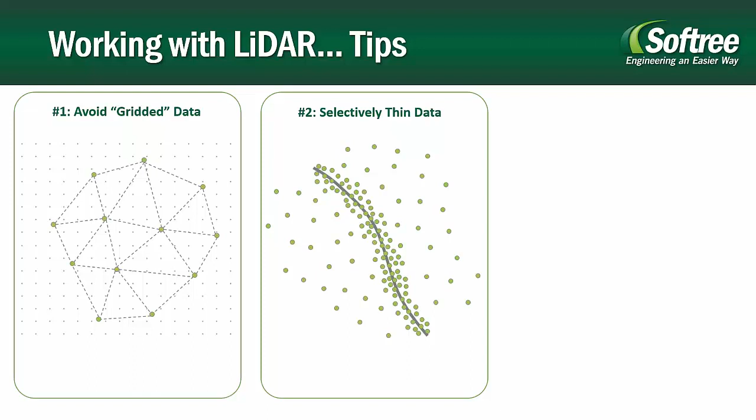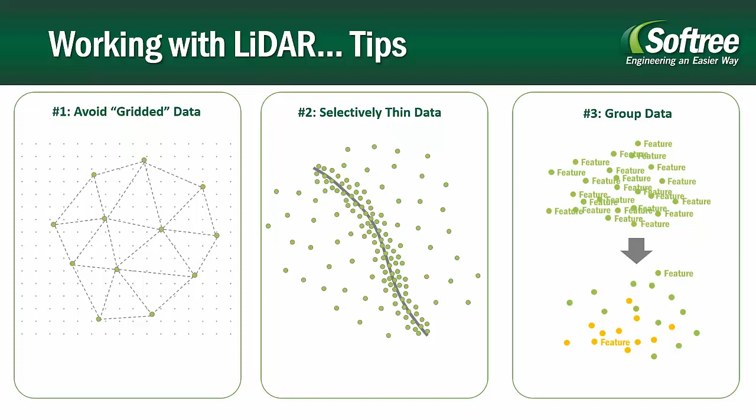And our third tip applies specifically to LiDAR data that's coming in as an ASCII data set. This is just combining features upon import. It saves a tremendous amount of memory and makes it a lot easier to work with. So the other piece I wanted to address before I pass it over to Dave, he is going to show you one workflow example today for working with LiDAR.

There are a lot of different workflow options that exist with our software. We've got two different areas where you can thin your LiDAR. You can thin it at import, and you can use a LiDAR thinning tool after import. So you've got a bunch of options, and depending on your data, the workflow that's best suited for it is going to vary. Our support team is always willing to field any questions you have about how to work with your LiDAR and what workflow works best for you.

As I said, you can import tiles all at once. You can import tiles individually. You can keep them at full resolution. You can thin them at import. You can crop them at import. You can thin them after import with our better quality thinning tool called point simplification. And then you can design using that full resolution data, depending on how big your area and your data set is. Or you can design your roads and features on thin data and just keep it as is.

Or you can design it on very thinned data as an initial concept and then re-import and re-thin your data. And one of the ones that Dave is going to include today in his example, he's actually going to crop the LiDAR on import. So selecting a specific area of interest that's a little bit narrower than the amount of tiles he's got. And then he's going to show some thinning techniques and work with it from there.

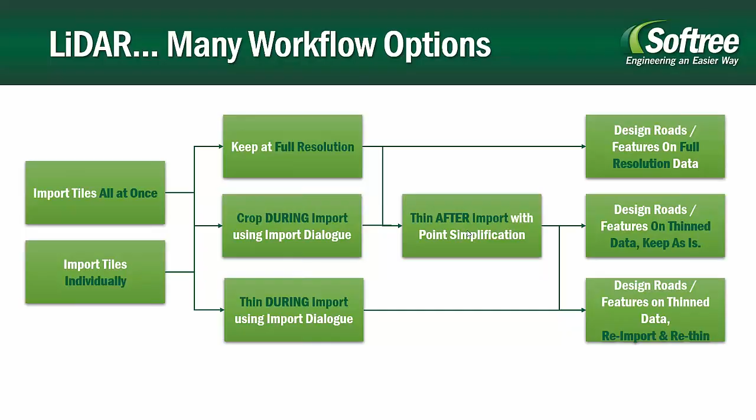Okay, we're working with the terrain module to start, so let's load up terrain module version number 9. Got a new splash screen here. We're getting ready to release version 9. What I'm showing you today is in both version 8 and version 9, so you don't have to worry about new features that you don't have yet. There is one feature I will not show you, but Live Map for importing images is pretty cool in version 9.

Okay, so let's first of all get ready to import some LiDAR data. Now, I don't really want to bring in all my LiDAR data, and I want to make sure I've got it in the right spot. So I'm going to open a shapefile, which shows the proposed block boundary. There's one, and I got another one in there too.

Now, I'm using File Open here, but actually I can use Insert too. Let me do that. Insert File, Shapefiles, and here's a little gotcha. Shapefiles come with an extra XML file. Do not try and open an XML file as a shapefile. It will fail. Anyway, if I pick this item from our import list, shape, then it only shows the shapefile heading, and those are the ones I want. And I want this block boundary and that block boundary. Whoops.

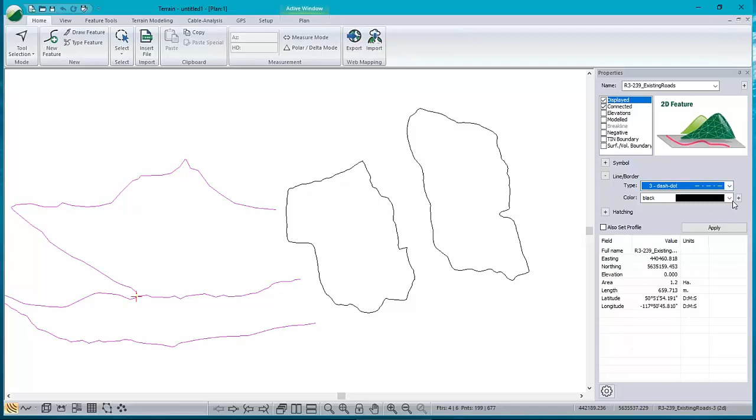There we go. When you're importing shapefiles, it's nice to sometimes import them one at a time, and then they come in selected, and you can modify lines and color. So for example, I just imported roads, so let's change the line type and color to be what I want to see for roads. Okay. Now the great thing about this file now is that I've got my two logging openings on the screen, and now I can bring in the LiDAR and see if it's in the right spot.

Okay, so let's again insert file. This time I'm going to pick all my LAS tiles. There they are. You want to, in general, use insert file when you're bringing in LiDAR data. First of all, because you can use the existing features in your terrain. And when you use file open, it deletes everything and starts again. So insert file. The other great thing about insert file is it allows you to select multiple files. Okay, so here's all my LiDAR points.

Now if I click on examine, it'll go away for a while and think, and it'll tell me how many user-defined points I have. Now this data set is unusual because they're all set as user-defined, and normally number 2 is called ground points. And this is the first LAS I found where it just says user-defined. So whoever set it up was a little sloppy. And it's not clear how many points I've got here. So examine files will tell me.

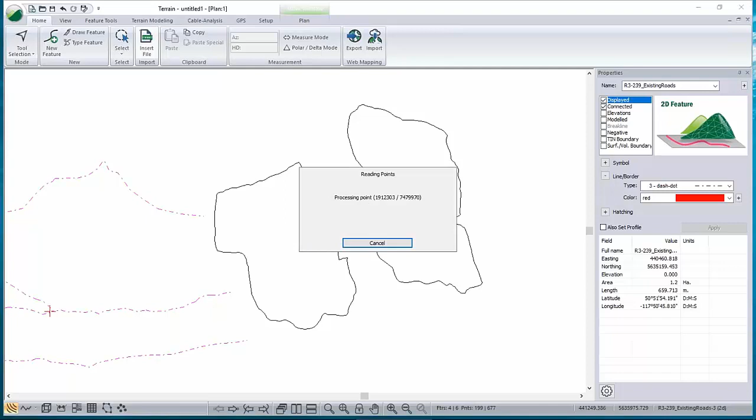So if you remember Aaron's little flow chart, this is thin at import, and there's my data. And you can see it coming up on the screen. Let's just zoom extents so we can see it all. And I've obviously got some data outside my area of interest. The blocks are over here in this blob, and then I've got this stuff over here.

Okay, so two things I've learned. I've got data in the right location. I can't remember whether it prompted. Normally it will prompt you and say coordinates undefined, do you want to read in these points? These points are in an LAS file. LAS does not come with a projection. I'm in the right projection because the data is landing on top of my shapefiles. So that's good news.

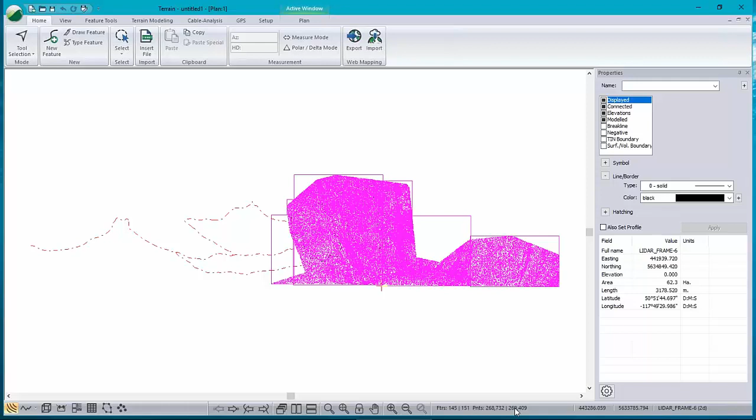The other thing I can see here is that I've got 269,000 points selected. So I read in 1 in 10. That means I've got 2.7 million points in the whole file in the ground points. Okay, those are good things to know. I'm going to delete these points and now read in a cropped set of data.

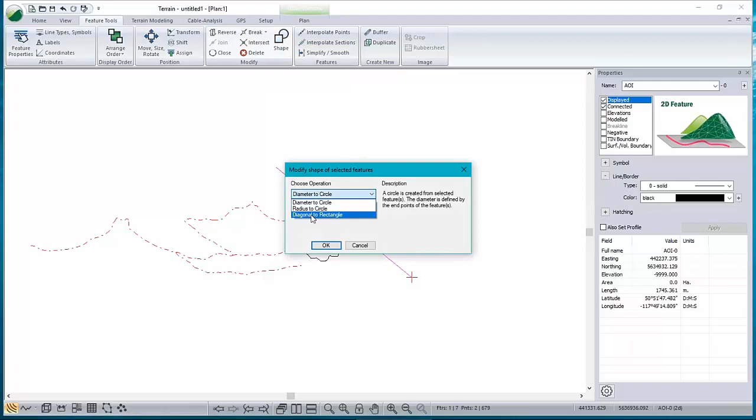So how do you crop data? Well, you build a polygon. So let's make a little polygon here. Call it AOI for area of interest. Doesn't need to be 3D, just a rectangle. Now I don't want to draw a rectangle by hand, so I'm just going to use this little feature operation to convert my diagonal into a rectangle. There we go. Right. So that looks like a good area of interest.

And now I'm going to read in my data again, cropping it. So insert file from the home ribbon, pick them all, and import options. Okay, I don't really need those borders. Let's turn those off. User defined, yes. Notice that the total number of points is quite a lot larger than 2.6 million, 43 million. So the other points in those files are not ground points.

Now I'm going to use my selection tab to do some cropping. So you can have various types of thinning at read time. This is before we've actually opened the files. And I'm going to use a polygon, which I called AOI. There it is. That's the feature I created. And here's the other features in my terrain.

Now I've got two regions that I'm reading in. Default, let's skip them all. I don't need anything outside my area of interest. Polygon 1, area of interest, I want to read in every point, so I'm skipping 0, or slide the slider up to high. Okay, let's get that started. It'll take a second. Yes, here we are.

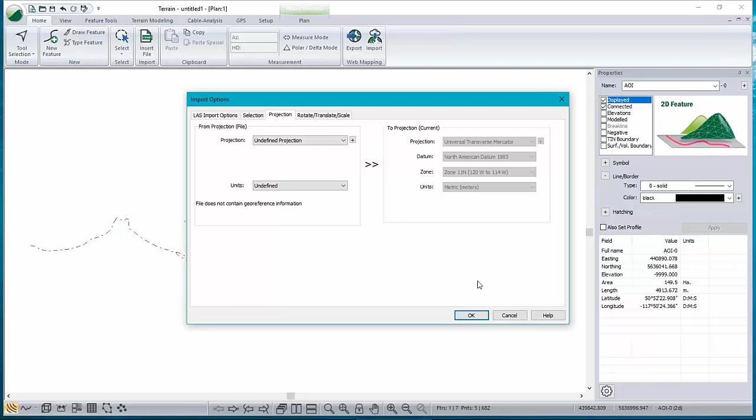Incoming coordinates are undefined, and that's normal for LAS files. So if I'm not sure, I can actually cancel here, and I can change the incoming projection and do a transformation if I want to. The fact is, I've already tested this data, and I know it's in the right coordinate system, so I can just continue. It takes a tiny bit longer to read with a rectangle area being cropped. There you go. There's all the data points.

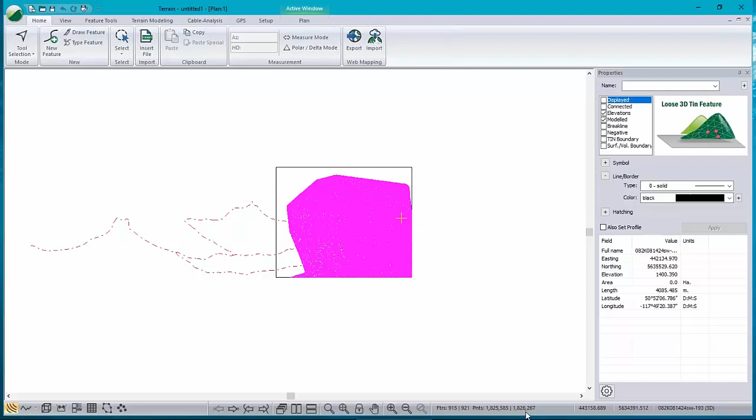Now that's full resolution, and it's showing 1.8 million points. That's still a lot of points, but certainly nothing beyond what Civil 3D terrain can handle. However, I'd like to thin it even more. So let's just zoom into an area in here. And notice that the data is very dense in places. I took the trouble a little while ago to look at some of these points, and they're less than 1 meter apart in here. Now, there's other areas that are a little bit less dense and sparse.

Now, if I had thinned my data at read time, it would thin it all uniformly, and it would maybe remove some of those critical points in the areas that are quite sparse. I'm going to use now the terrain modeling simplify option to thin data in a smarter way. What this does is it builds a grid. I'm picking my grid size as 1 meter, and it's going to remove all but one point in every grid cell.

So points that are already isolated will not be removed. They will be guaranteed to stay in the model. Points that are very dense, where there's 2 or 3 points inside that 1 meter grid cell, it'll keep one of them and throw the others away. Let's see what that does.

So I simplify my data, and it's reduced the number of points from 1.8 million down to, looks like, 1 million. Oh, those numbers were wrong. The actual number of points has been reduced down to about 756,000 points. Okay.

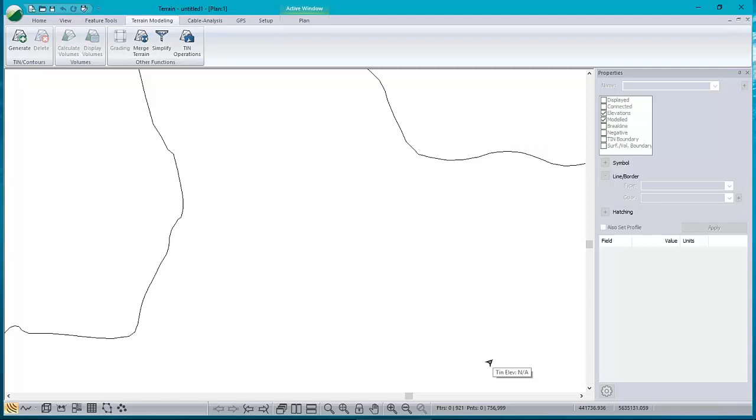Let's take a look at them. And you can see they're more uniformly spaced. The sparse areas are still sparse, but there's no points removed from there. The dense areas are now roughly 1 point per every square meter.

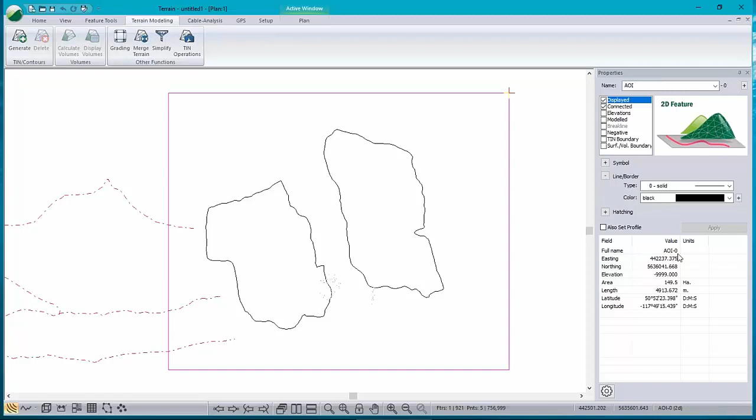Good. Now I'm going to make a surface out of that. I don't need my area of interest anymore. Let's just delete that. I'm almost finished with LiDAR import. At the end of this whole exercise, we could go back and re-import to bring in data at higher density near my road. We'll talk about that later.

Okay, so I've now got a fairly accurate model with under 1 million points, so it's quite small by comparison. And I'm going to generate a surface. Okay, you've probably all seen this before. I won't go too much into the details here.

One thing I want to mention, though, is that when you bring in multiple files, Terrain gets confused about the start and end elevations for your contours. Notice that the calculated range is outside of the numbers that are in there by default. So I'm just going to fix those. And I need to do that for both major and minor.

I'm going to turn off labels. I'm going to bring in points. I'm going to make sure there are no large triangles. So 25 meters is the biggest triangle I'm going to create. We won't interpolate between points that are farther than that distance apart. Looks good. Okay.

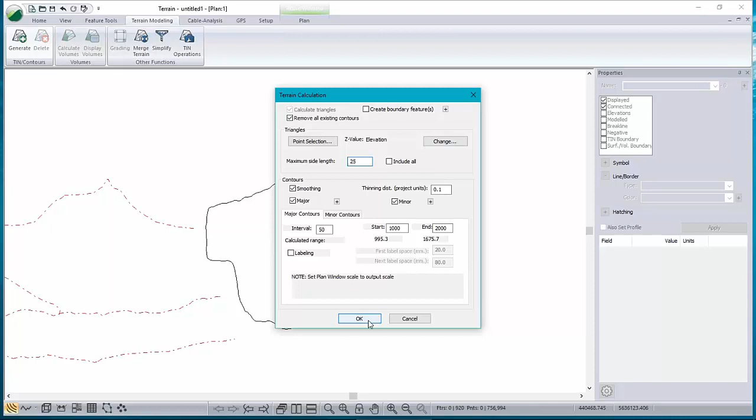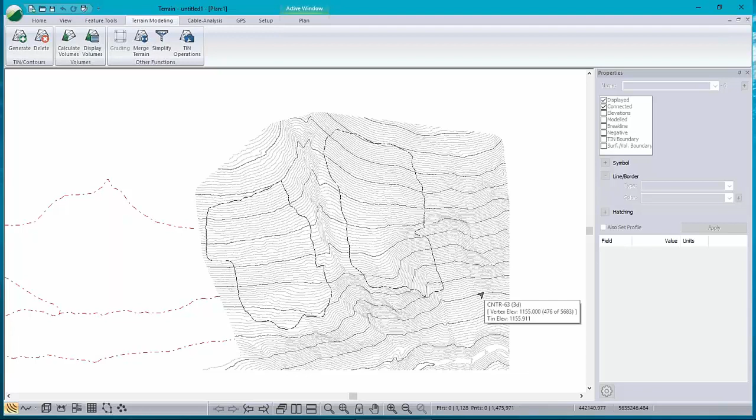Great. Notice the number of points, and you can see that down in the bottom of the screen here, the total number of points has gone from 700-something thousand up to 1.4 million. Those extra points were created by the contours. The contours have a lot of points in them. And if I do a little screen scroll here, it takes a while for the contours to draw. So I'm going to do one more thinning operation.

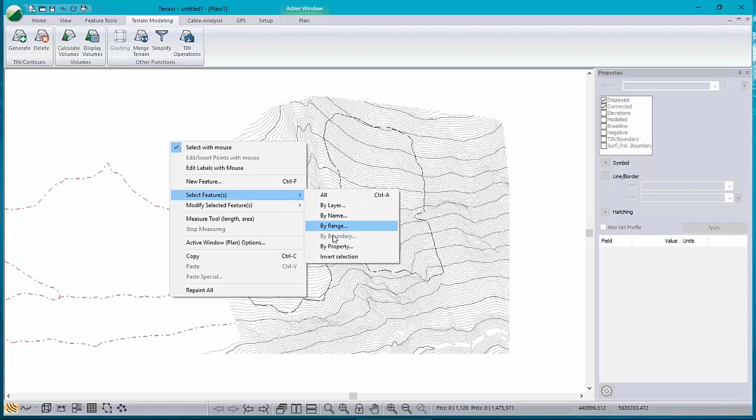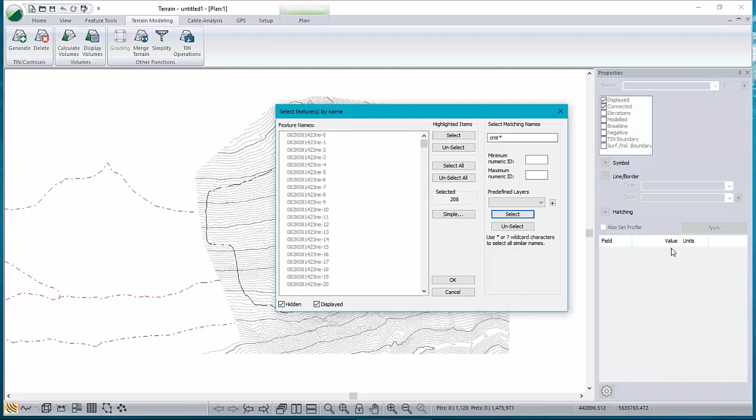I'm going to select all of the contours. When you select by name, it's a good idea to unselect all first, or at least notice that there's none selected. And then here we are, CNTR*, so that'll pick up the contours and the major contours, which are CNTR M. There they are.

So just like you can simplify the points in a surface, you can also simplify the points in a feature. And what that does is it just removes points that don't really add to the shape of the feature. You need to put in a tolerance. I'm going to say 0.2 meters is my tolerance.

That will mean that the resulting feature with fewer points will not deviate from the original feature by more than 0.2 meters. Okay. Notice that we have 700,000 points selected, 208 features. Those are the contours. After my simplification, we only have 50,000 points selected, and the draw time is way faster. Good.

Now I've got a surface, and I'm ready to go on to my next step, and that is to try and find a landing location by using our cable analysis software. Let me just save this in case something goes wrong. So I've already got it on here called Topo 1. I'm just going to call this demo.

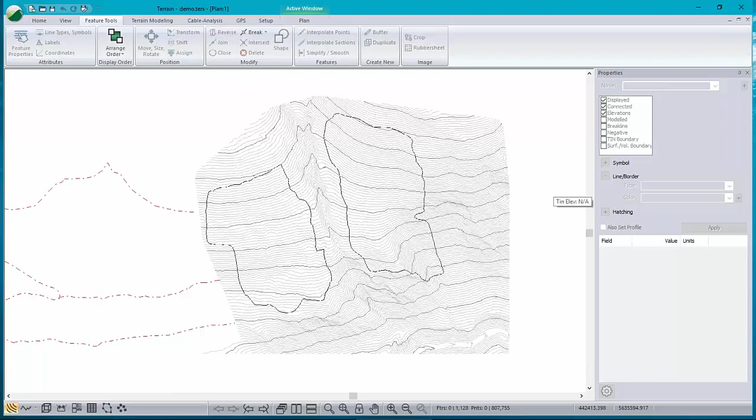Right, so cable analysis. New feature in version 9. Oh, I lied at the beginning of the webinar. This is brand new. This cable tool, we call it Explore Deflection. And let me demonstrate. So here's all our logging systems. They used to be called logging setups in version 8.

I've got one here called Grapple. It's been on my hard drive for a while. It's been set up already. In general, you want to set these things up beforehand, and you can do that in the logging setups tool on the cable analysis ribbon.

Okay, so I'm going to pick my Grapple yarder as my current yarder, and I'm going to choose a calculation. Now there's a few options here. This one and this one make sense for a Grapple yarder, which is a running skyline. Simple third point deflection works for everything, and it really is simple. So let's use that to start with. It really doesn't do a calculation, it just draws a picture. But it also can determine when the 10% deflection hits the ground.

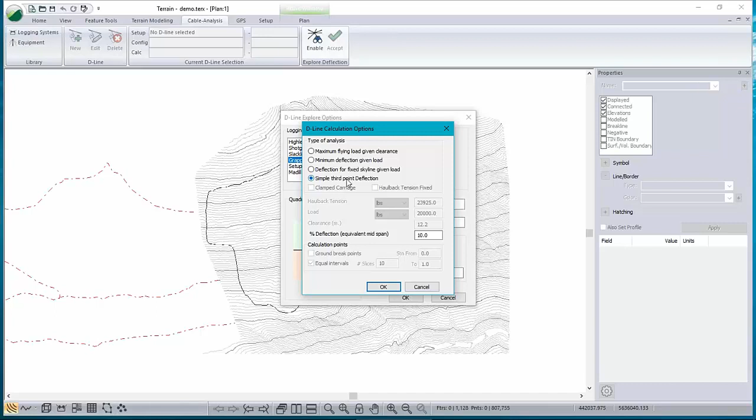Okay, and these options allow me to choose the length of my exploratory D-lines, the number I'm going to try, and this is the tail hold spar height. Auto position means that the tail hold will be moved out away from the landing until the deflection hits the ground. And then show area polygon. I'll show you that in a sec. Okay, so let's see what this does.

What this does is it changes my cursor. We've got this enable button depressed, and whenever I click, oops, I'm falling off the model. Let's not look at that again. I don't need it. You can see a whole bunch of deflection lines and a polygon which connects up the ends of them, and an area, 11.6 hectares.

So it's a good way of telling whether you've got coverage of your block and from where. So for example, down here, you can see that I'm actually getting good coverage of that area. And when the, yeah, that's a good spot. Let's pick that spot right there.

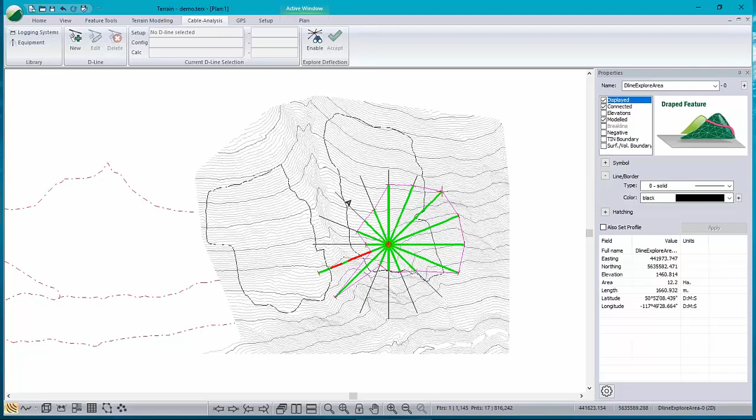So I click on the accept button, and you can see all the cables have been drawn now. They're no longer faded. They're full brightness. There's my polygon that represents the area. Of course, it has a well-defined area, 12 hectares. And we're kind of covering a little area we don't need over here, and we're a little bit short over here.

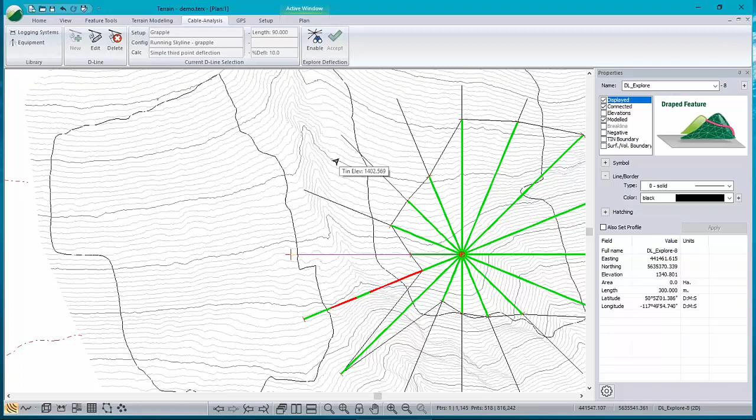What do these deflection lines look like? Well, let's pick one. Whoops, hit the contour by mistake. Let's pick a deflection line. There it is. They're all called DL Explore, so they're easy to select and delete with select by name. Let's create a profile window, show them side by side. So there's my deflection for this particular one here.

And you can see as I move out from the landing, this point where it puts the tail is the location where it's just about to hit the ground. If I move the tail out, it's going to submarine through the dirt. And that's not necessarily impossible. It just means you've got partial suspension, or at least the carriage is dragging on the ground. Is that true? The log's dragging on the ground. The carriage will probably go up higher.

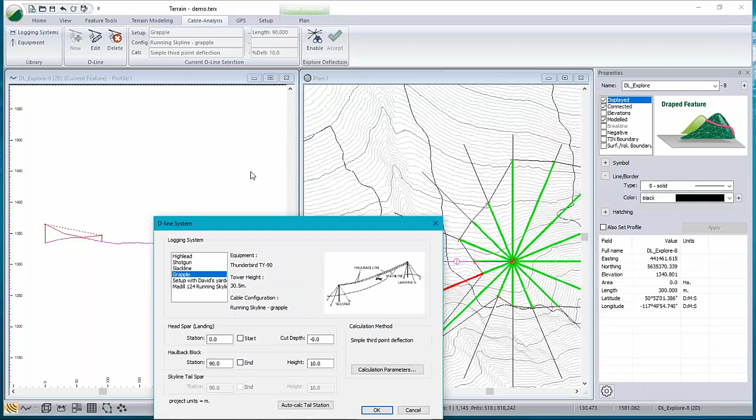We can use now the cable analysis tools to actually adjust these things. And like here, for example, I might want to just change the tail position. I should have looked at that first. Say I want to go all the way out to there. That's my tail position, and you can see that station number is, oh, no hover tip. How annoying! It's about 150. I can read it off the bottom here.

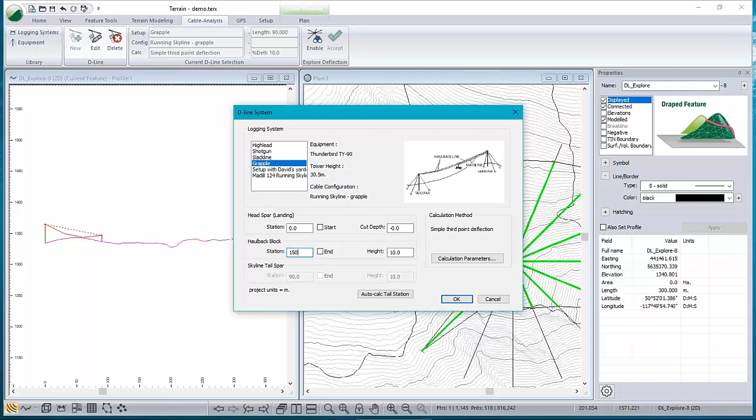So I'm just going to change my haulback block position to 150 and apply. There we go. And you can see it's going underground a little bit there. That would be no problem if we change the calculation to have a smaller percentage for deflection. There you go. It's above ground now. Okay, so you can modify these things.

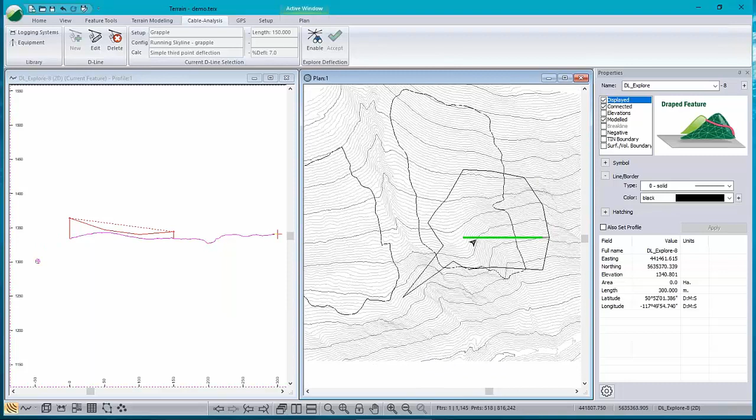You can delete them. You know, they're just features. It's easy to select them all by name. You can select them all by going here, actually, just by dragging a little rectangle around the center. And you can also change other features like calculation parameters.

This is going a little beyond where I wanted to, a little more detail than I wanted to cover for deflection lines. So let me go back to the Explore mode. I'm going to delete these. Do I need to? No, I can leave those in there. Sure, what the heck. Go back to Explore mode. So again, you can pick from a yarder that you've already set up, choose a calculation. This one works too.

This is doing a real calculation. It's calculating cable strengths, cable tensions, all that stuff along the alignment, along the D-line. Let's see what that looks like. Okay, so that's kind of a smaller area. If I go back in here, change the load to be smaller. I went from 20 to 10,000. And click again, you can see I'm getting a larger coverage.

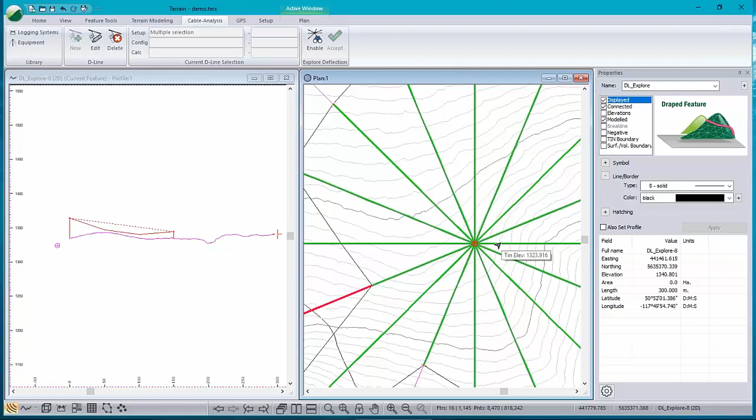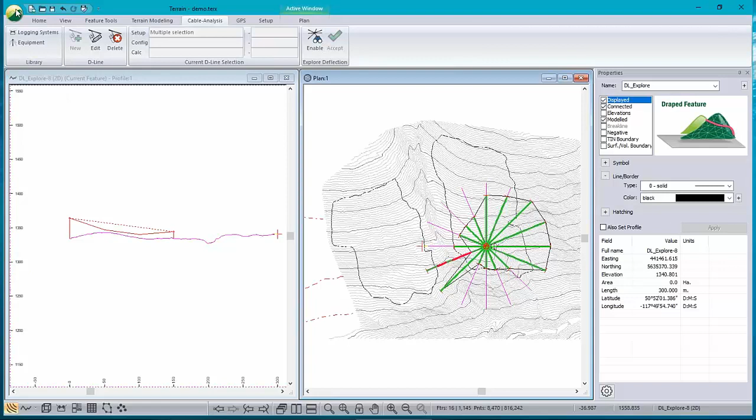Actually, I already did this earlier, and I put a feature on the surface where I want the landing to be, and I want to now go into the next part of my planning operation, which is to try and find a road that will connect up to my landing site. Okay, let's just reopen that terrain.

So here's a terrain with the landing on there and some existing roads, and I want to build a road to get to the landing. So really, I need to go to my location module and do road design.

Now you can draw features on the terrain in the terrain module and look at the profile, but really it works better in location because you get so much more information at the same time, not just the profile, but cross sections and grade labels and so on. So I'm going to switch to my location module.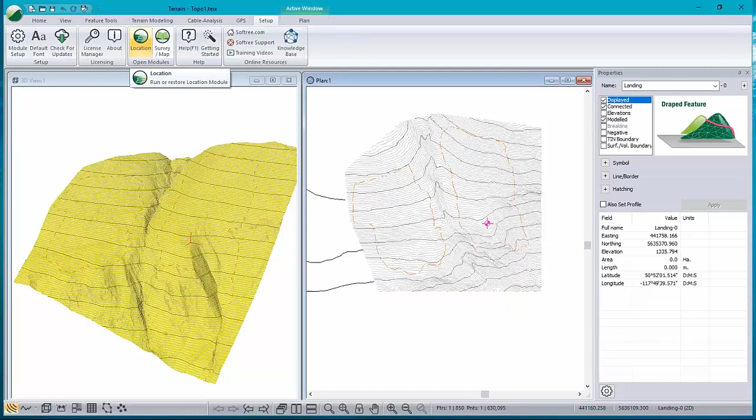And I'm going to create a new alignment. So I'll use that same terrain. Sure, we'll start on the current point.

When you create a new location design in RoadEng, it does a couple of things automatically. It opens the normal screen layout, it reads in a cross-section template from, let's just look at all our templates, from a table called normal TPL.

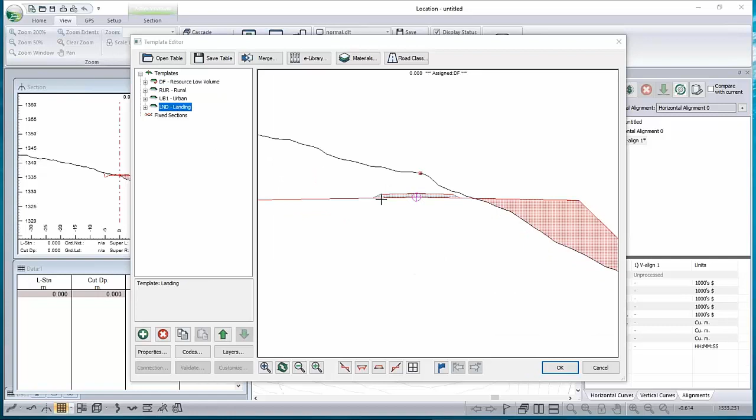And here's all my templates. I've got a default roadway template that looks like this. I think it's about 6 meters wide, 3 meters each side. And big ditch, steep slopes, pretty typical forest road, daylighting over here. And I put another one in this table called landing, and that just puts an extension on both sides. But we can choose left or right when we assign the template.

Right, so let's design this road. I want to go from the existing road over here to my landing, which you can see there. So let's pick that point and move it over there. Could have gone the other way, but it's traditional to go from outside in.

Create a new alignment point. Let's stick it right on the landing. I could snap if I wanted to, but then I find I'm always snapping to the contour. So I'm just going to get it lined up as well as I can.

This warning is usually not a problem. All it means is that the cross-section will be a little narrower than it should be, and the default width is 500 meters on each side, or 500 feet if you're working in imperial units. So not a problem. Don't show me this message again.

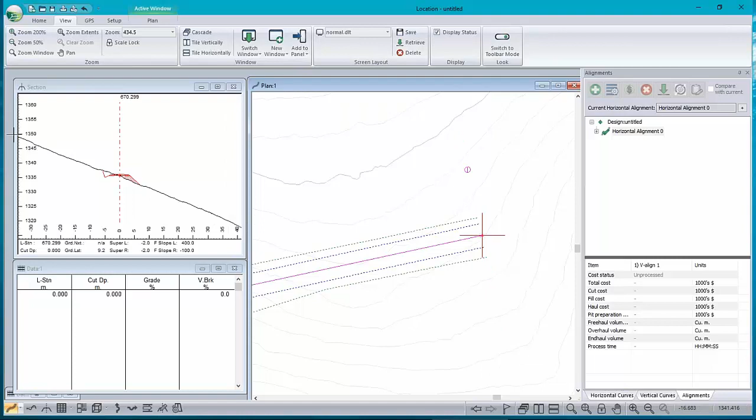You can see that cross-section is plenty wide. Okay, what does that look like in the profile window? There it is. Now I could start designing here for vertical and horizontal alignment, but at this point I want to do something called pegging, and I've got a screen layout for that.

And this comes with our training tutorial. If you download the training tutorial, it'll be in here under training pegging. There it is. And I've been modifying it slightly, and I've stuck one up here in my regular screen layouts folder. And it looks like this.

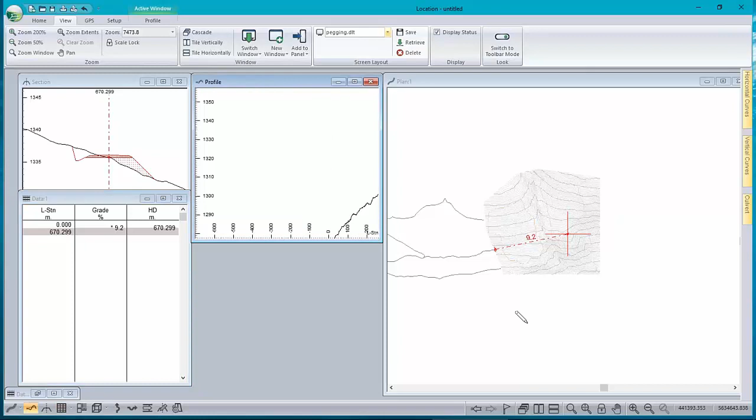So let's just zoom extents on the profile window. Zoom in a little bit on the plan. So we can see the cross-section. We can see all the legs I've created, all the horizontal alignment, PI features between PIs. And you can see a big grade on the plan window.

So yeah, if I move my alignment, everything updates. Profile, cross-section, that's 21%. So I couldn't go probably straight up if I wanted to get to this point. I'd probably have trouble getting there.

You can kind of peg along the alignment like so and watch the grades. But for this particular road, I like the idea of just getting it from beginning to end and then try and straighten out this profile here. So it looks like it's a pretty steady grade up to about here.

So I'm gonna stick a point in there. Now you can see I've got two tangents, one at 9.8%, one at 7.9%. Let's lower this one down a little bit, try and make them more equal.

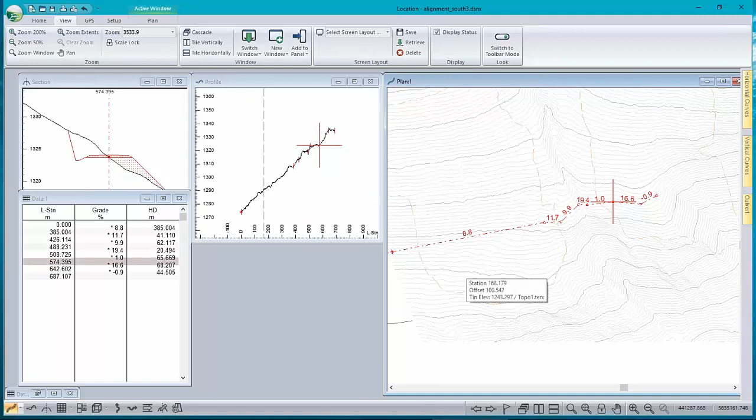Now let's put in the vertical alignment. I'm just going to open my normal screen layout again. My screen is a little bit small, so I've got the profile behind the plan. Pretty straight grade. Let's just go up to the end of the road, and then let's make it a little bit flat at the end because that's where the landing's going to be.

Now I've got a steady grade in here. I can go back to my horizontal alignment and try to get rid of any large cuts and fills. You can see the large cuts and fills just by looking at the slope stakes, and I can do that with horizontal alignment.

For example, I could move this point downhill a little, uphill a little bit. There we go, uphill a little more. Eventually I'll get to full bench. I've set up my section window.

That's part of my screen layout to do horizontal alignment. So if I'm in edit mode, pencil cursor, I can just move into the section window and click and move horizontally, and that allows me to do horizontal alignment from the section window, and it's easy to find full bench.

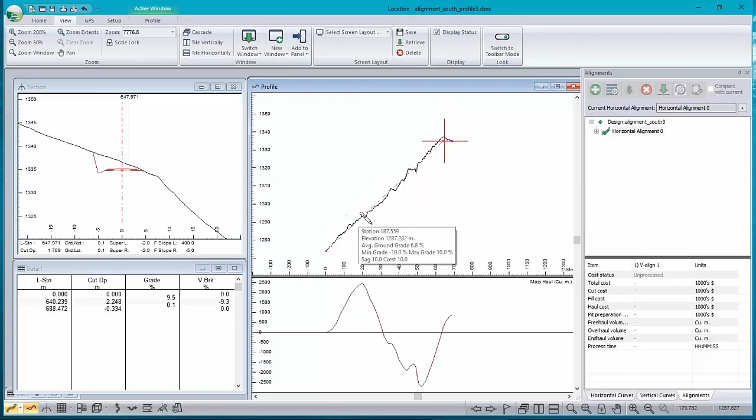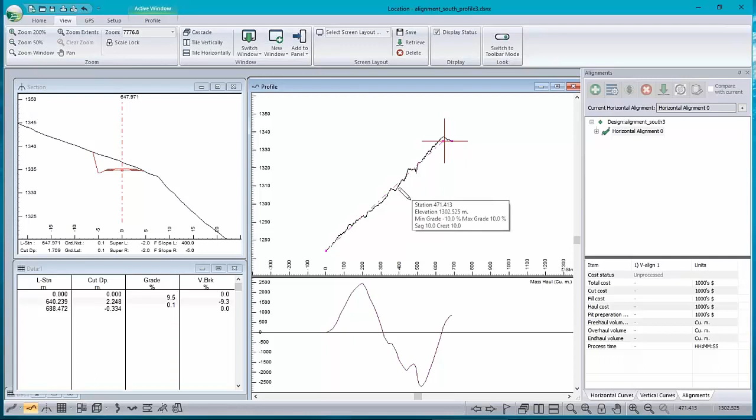Okay, so we've got a reasonable road design here. Let's put in a landing. So let's go from about here, 660, to the end, with a widening on the left.

Assign by range. We've been using the default template since we started, that's the default, that's why I called it that. So I'm going to put the landing template in.

Now I actually only want it on the left-hand side. If I put it on the right, it would cause a sliver fill, right? So I'm going to click on this button for left only. Notice that it messes up my choice up top here. So generally, you want to click on left or right first, and then choose your template, and then choose your station range.

660 to the end, add, there it is, landing's in there, recalculate, and there it is. So this is the cross-section before, and as I move through the alignment by clicking on these little buttons down here, there's my landing. It's got a slope down to the ditch, and it's much wider than the original road. That's one way of creating a landing.

There are two more that I want to show you. First of all, I'm going to put one right here, okay, so that's around station 200. And this time I'm going to use, whoops, wrong button, I'm going to use the overrides tool.

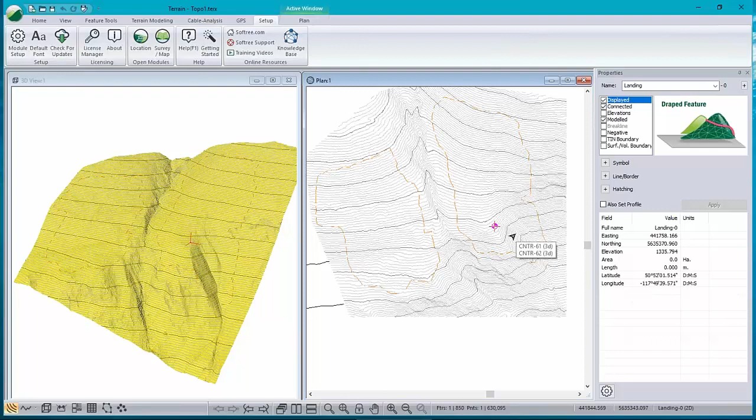And I made a terrain. Let me just show you what it looks like. So here's the terrain we just created at the beginning of this webinar. And if I select all points, Control A, you can see that they're pretty uniformly distributed. Now I'm going to show you another terrain that I created.

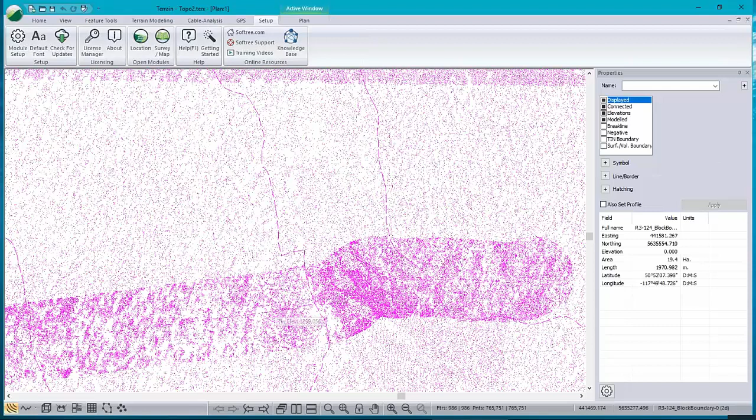Now it looks the same, but if we zoom in a little bit on this roadway here and look at all the points, you can see that the points near the roadway are dense, and away from the roadway are less dense. Oops, it keeps redrawing here. We don't need to see that.

So how did I do that? What I did is I brought in the data at full resolution like we did before. I don't have an example here. And then, instead of just thinning everywhere, I picked this feature here. Well, I didn't have to actually pick it. I have to know its name. It's called CL. That's been exported from my location design.

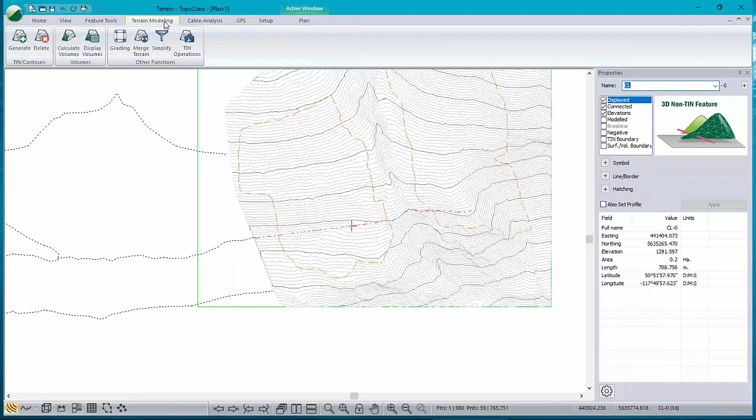And I did my terrain modeling thinning with an excluded region, corridor CL. There it is. Like so. There's a 100-meter swath around center line that will be excluded from the thinning. So now I could thin this data and it would leave that data untouched.

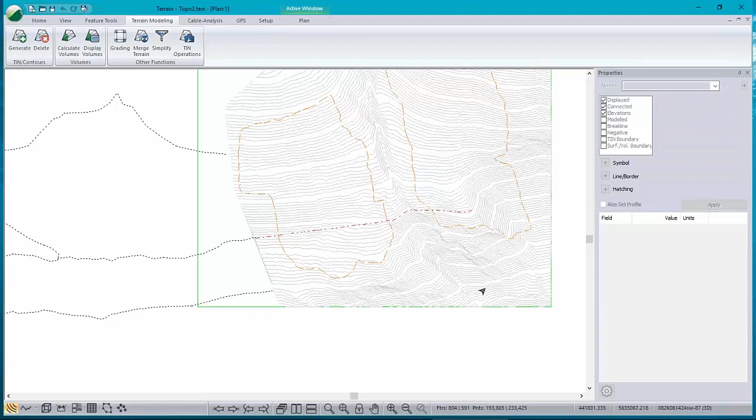Yeah, let's just thin it down again. I'll show you the results. We won't save this one. Okay, it's removed a whole bunch of points. And now if I look at all the points, you can see very clearly what it's done.

So like I say, I did that with Topo 2. If I go back, let's close this without saving. If I go back to location design, I can switch topos now. I can just go to my setup, location, alignment, terrains. And I can just switch out my topo terrain and use a different one.

So why would I do that? Well, the idea is that the different terrain has a more accurate surface in this zone. So when I calculate things like cross-sections and cost values, or even use our optimizer, you're getting a slightly better result than if you used a thinned terrain that had points removed from the surface.

That's all I wanted to cover today. If anybody has a question, please type it into the questions area. Oh, I have a question.

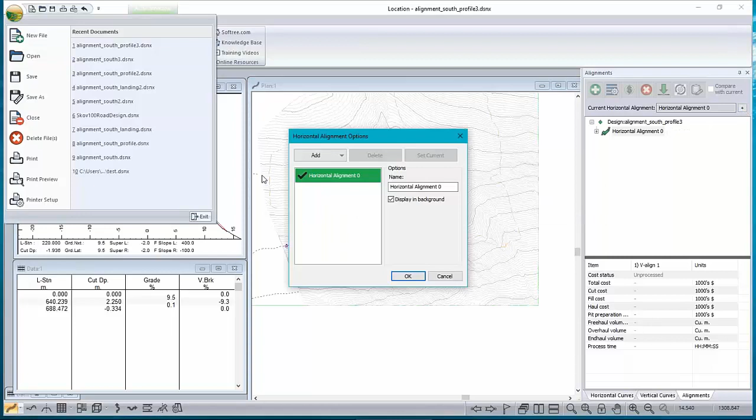and just start designing, or you could just create a new road, new file, pick the same terrain and design your alignment. The nice thing about the multiple horizontal alignments is that you can, let's do it. Let's call this spur. So you can see both of them at the same time. So here's my spur road.

Oops, that's not right. Did I just duplicate? Let me reopen here. I think I did the wrong thing. No, I don't have to reopen. I'll just delete it. Oh, all I did was rename it. Yeah, okay, sorry.

Let's do that again. Go into the alignments panel, click on Add. Yeah, I renamed this one. Let's call this Main. And then click on Add, New. You can duplicate the existing if you want, or add new, and call this one Spur. Okay. What? Oh, it didn't accept my name.

Oh, there we go. Okay, so I'm getting the same dialog box I get when I do File New. I have to choose a place where I want the alignment to start. I'll just pick Center of Terrain. Oops. There we go. So my first point ended up here. I can move it to where I want to actually start the road, and I can design another road, and you can see the old road in the background.

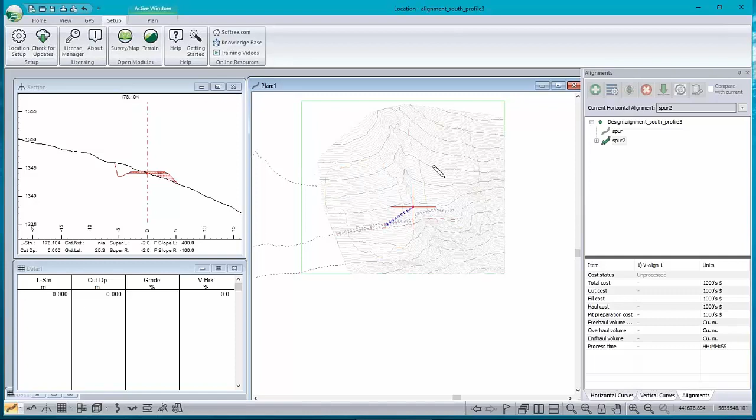And you know, in this particular design, and I can show you this in the terrain module, the people who were kind enough to lend us this data had designed a road going in and had switchbacks going up here. So yeah, pegging roads is easy when it's nice and straight like I had. It gets harder when you're doing switchbacks, but the same tools are extremely useful, and it does work. Yeah, if I put in a switchback here, let's go to pegging.

It's hard. You get these classic switchback situations where the first leg might be okay and the second leg might be okay, but it's super steep up here. There's the zone where I'm going through the switchback. It's very, very steep, so we're going to have to cut down here. We're going to have to fill down here and cut up here. And you probably need to put curves on too. So switchbacks are hard.

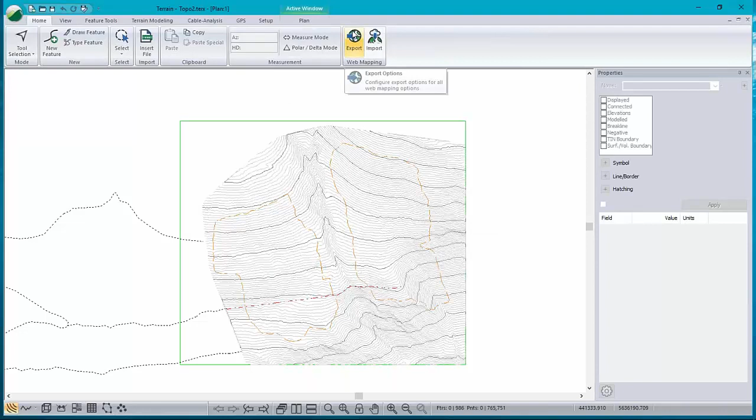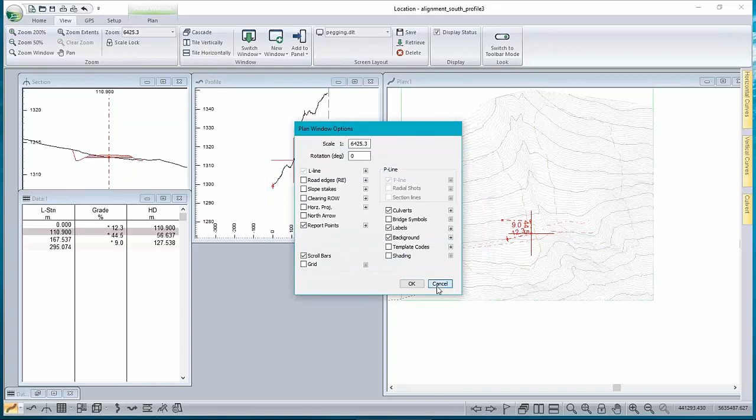So I can't use the, okay, let's just set this up quickly, sorry. Can't use P-Line Explorer from the location module, but if I use it here and accept it, those features will be visible. And there they are.